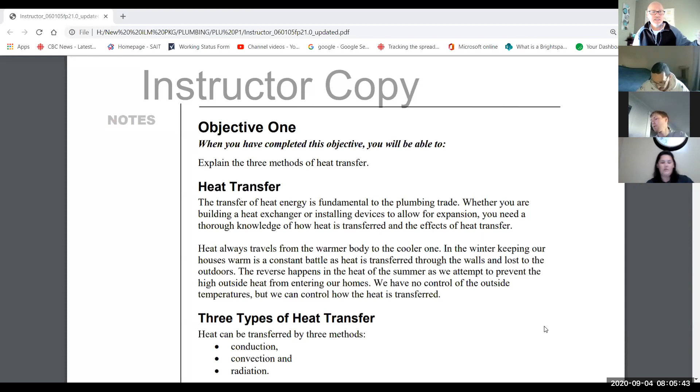Does anybody know? We live in the north, in the Arctic, don't we? Without heat, and we all know winter is coming, so to speak.

Yeah, we all die. So we live in a cold climate for 6 months of the year, colder, and we need the heat. So this is really important to us.

So if you are a highlighter type person, heat always travels from the warmer body to the cool one. Okay, it really does.

When I go to bed, the wife sucks all the heat out of me. It's really crazy. She's got cold feet, and they're like ice cubes when they come in contact. Anyways, heat travels from the warmer body to the cooler body, and that's how we do it.

We have no control of the outside temperatures, but we do control how heat is transferred. We have 3 methods. Here's the 3 methods we're going to talk about today: conduction, convection, and radiation. And of course, you probably already know some of this stuff.

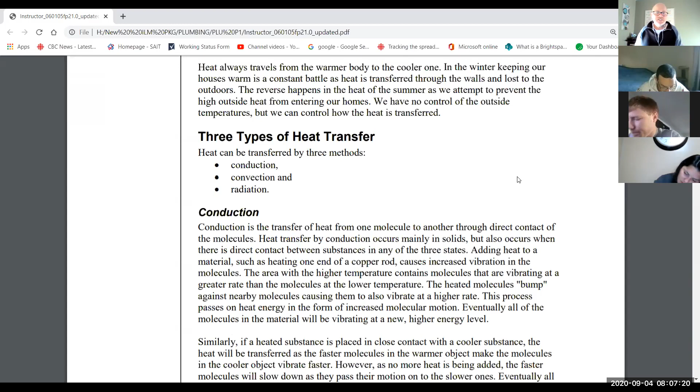So conduction basically means touching. When the molecules are together and they're touching, the heat is transferred from one molecule through direct contact to the other molecules. And they get excited, right? When they get heated up, they start to move faster, and they get excited, and good conductors for conduction, it transfers through that body really quickly and really easy.

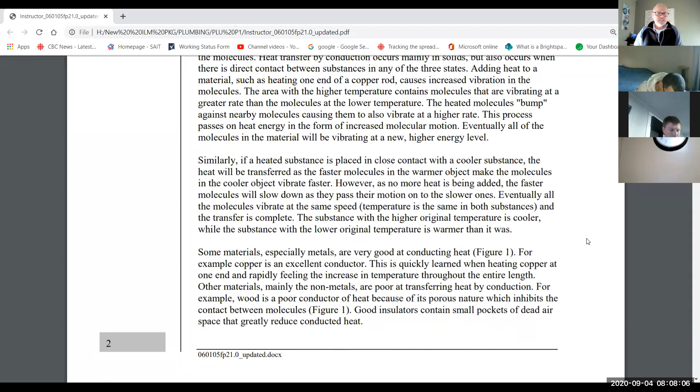So this couple of paragraphs, I'm not going to read this to you because I don't want to. But it really is about the transfer of heat through conduction is about touching. It's when something is touching something and it transfers that heat.

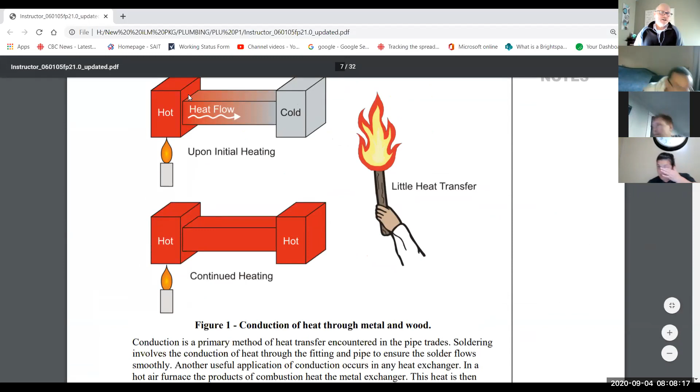Now let's have a look at this picture. As you can see, if this block here, if it was copper, and if I heated one end, the molecules will continue to heat up or move, if you will. As they move, they will transfer all of that heat throughout the entire body. And that is really what conduction is all about.

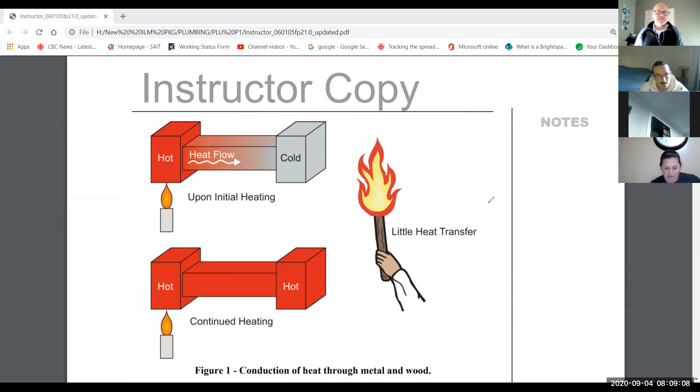Now look at wood here. You could have a wooden match lit like this, and really there's no real heat transfer in the wood. Is wood a good conductor then? No, wood is not a good conductor. It is truly not.

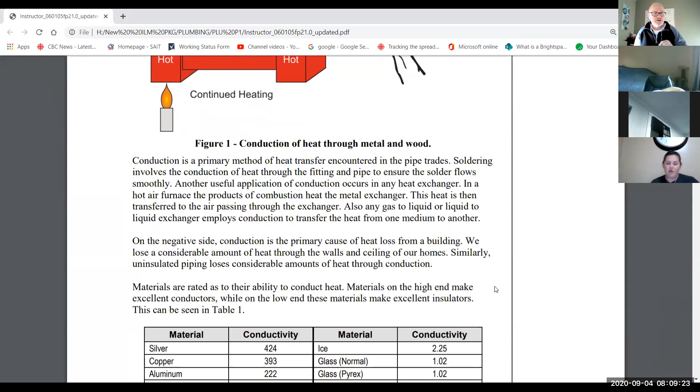So conduction is one of the primary methods. Remember we said 3 methods of heat transfer. It is one of the primary methods. They talk about useful application of conduction in a heat exchanger.

A heat exchanger is where you take cooler water, running through a coil, coming in and going out. And then you have warmer water coming in and going through a coil. And as a heat exchanger does this, you tend to start to heat up.

You tend to start to heat up this blue colder water as it goes through the heat exchanger, and you get warmer water coming out. So it is the transfer of heat from the warmer body to the cooler body, basically just like that. So this comes from a boiler, from a heating system, and through a heat exchanger, you transfer heat. That's what they're talking about there.

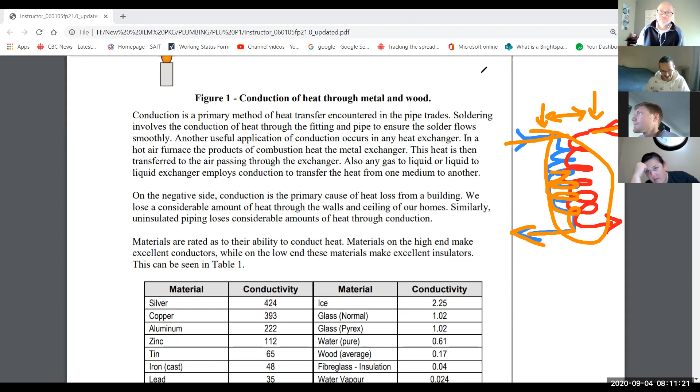What are you doing? Say again? No, I was talking to my cat, sorry. Oh, good morning, cat. Didn't strike me as a cat person, but that's okay. I have a cat. Really, cats are the laziest animals I think I've ever seen in my entire life. Absolutely, just lazy. They don't have to hunt, gather, nothing. The darn thing just poops in a box in my hallway. I don't even know. That's it. He just sleeps around the house and sleeps everywhere. Scratches me when he can't eat or needs to eat. I don't even know. Yeah, same as mine. Yeah, same thing. Okay, so we're on that. I should get a dog. Or a mouse or something.

Okay, look, on the negative side, there's a negative side to conduction. There's a negative side to every form of heat transfer. The negative side is that this is the primary cause of heat loss in a building. So when we're building buildings these days, the idea is to try to get a very, very tight envelope, right? That's the building shell, so to speak. We want our building envelope as tight and as insulated as possible so we don't lose our heat.

But the Alberta Building Code states that we also have to exchange the air within our buildings completely. A half air exchange per hour, I think, is the latest ABC building code. Now, let's see if I can annotate this.

ABC is the Alberta Building Code, right? And they require a half air exchange every hour. What does that mean? It means that the air inside our houses and buildings needs to be moving, and we need to take that air out and bring new air in.

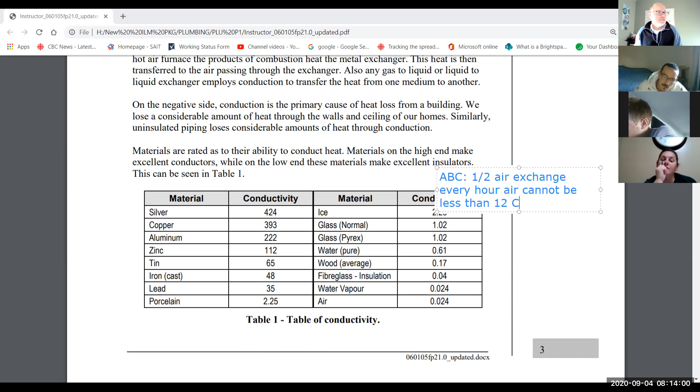Now there's an issue with some of this air coming into our houses and buildings, it gets cold outside, yes? And so the Alberta Building Code also says that air cannot be less than 12 degrees Celsius coming in. Which means for bigger buildings, apartment buildings, etc., we need makeup air units that heat up the air before it comes into the building. The air we're pumping into our building has to be above 12 degrees Celsius.

Now, have you ever opened a building door on a tall building and the air is pushing outwards? There's positive air pressure in those buildings, okay? So every time you open the door, you can feel the rush of air hitting you. It means there's positive air pressure within that building, and they keep it like that so they can keep the heat in, believe it or not. Okay, so that's how that kind of works.

Okay, let's see if I can scroll down here. Oh, that thing just stays with me wherever I go. Nice, I don't want it to.

There we go. Now look at this table, this lovely table right here. It says this material is rated according to conduction. It's a conduction table, a table of conductivity. So silver and copper are good conductors.

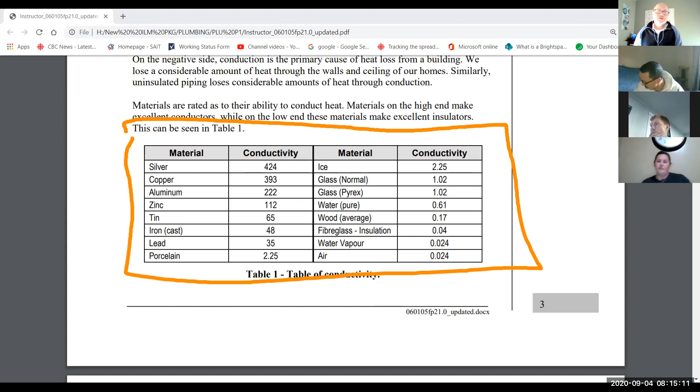Does anybody know why? There's a reason, does anybody know why? Purity? What's that, their purity? Nope, no. I'm going to tell you it's because of their makeup. It's because they have these extra electrons hanging around them, and these free electrons, so to speak, tend to move freely through the material.

So we use copper as a conductor for electricity, yes? We use copper as a conductor for our heated water, yes? We use it in heat exchangers. We use it a lot because it's a good conductor. So when you push, for example, electrons down a piece of copper wire, it transfers those electrons almost without any resistance, and it'll transfer all the way down to the end of wherever you have it. That's why we use it for electricity. It's a great conductor, it has that free electron that allows the transfer of electrons throughout that whole piece.

Now look at air. Is air a conductor? No. Well, according to this table, air is a conductor. It made the list. It's a very poor conductor, though. Yes, fair enough. Okay, it's a very poor conductor, but we use it all the time, especially in our houses.

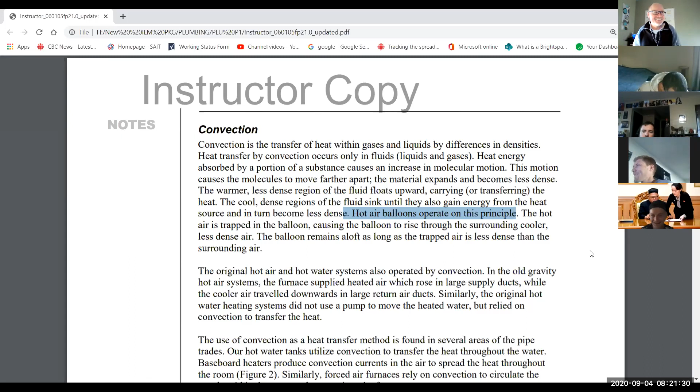Now they talk about some old gravity systems in here about how heat transfer rises. So way back, we used to heat with just a big tub of water with pipes attached to it, and we'd put a fire under it, and we'd heat our houses that way, because just through convection currents of the water, that heat would rise. So let me draw something rudimentary.

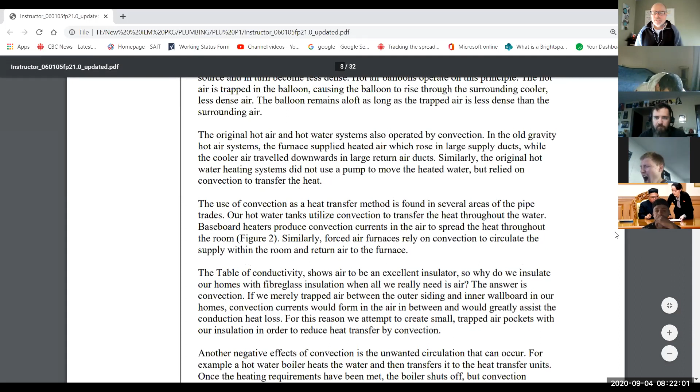So we would have a big boiler in the basement, or a big cavity full of water, and we would light a fire under it. There's my fire, so to speak. Okay, there's my fire, and they would use coal, wood, etc.

And then what they would do is they would have this water piped upstairs, and it would come back. So as this water is heated, it would go up because it's warmer, just through convection currents, and it would heat the other rooms, and through convection currents, it would come back to the boiler to be reheated. That is really the basics of a boiler. They used to do that without pumps, without circulators, just through convection currents. Now, having said that, this pipe would have to be very big, 2-inch or larger, to carry all that water, right? Because that's all you have.

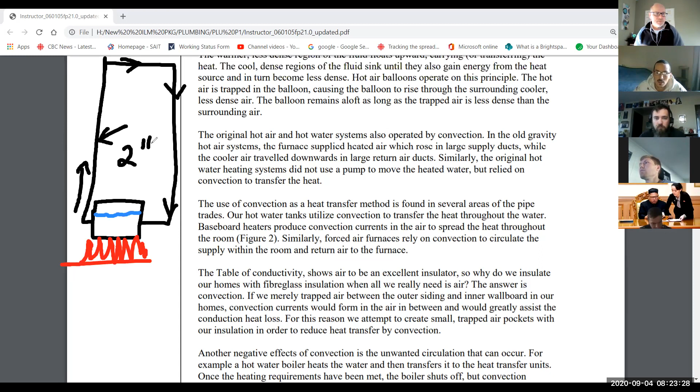That's it, but that's a very old school, if you will, type of boiler. Alright, let's clear that off. Now, baseboard heaters produce convection currents of the air to spread throughout the room. And then again, forced air furnaces rely on convection to circulate the supply around the house.

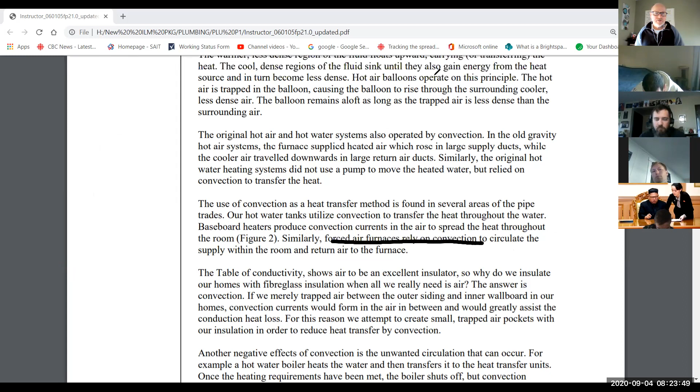Okay, now let's clear all of that. So there's negative effects too, positive and negative effects of convection. So we can get unwanted circulation that can occur, and they talk about a room being overheated because of convection currents. And there's different controls that we use to stop that from happening.

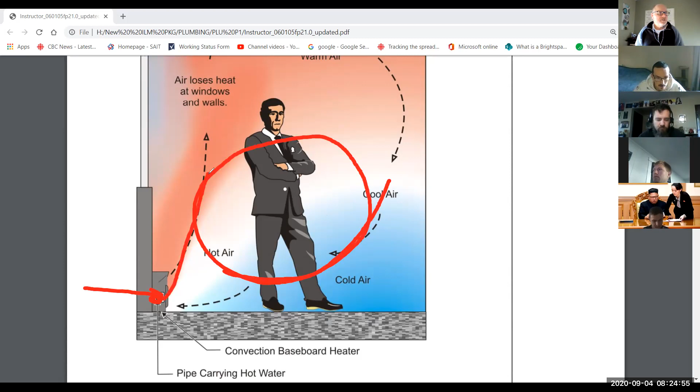Oh, there we go, convection currents of a baseboard heater. Look at this guy, he's very chilled, just sitting there. So this pipe right here is a baseboard heating pipe with the hot water running through it, and we usually have fins on that, is that correct? We have fin baseboard, so we run hot water through there, and just through convection currents we have this air circulating, the cold air dropping down, the hot air coming out. So that is just basically clear convection baseboard heating, and that's what we have there.

Beautiful, and then we get to the third one, radiation. Okay, radiation. Now they use this great term, electromagnetic infrared rays. That's fine, but heat will transfer on a radiant issue without heating the air in between it. It heats the objects, it's the sun in the sky, that's radiant heat. It does not heat the air, it heats the objects, which then heats up the air. Really, that's what it is.

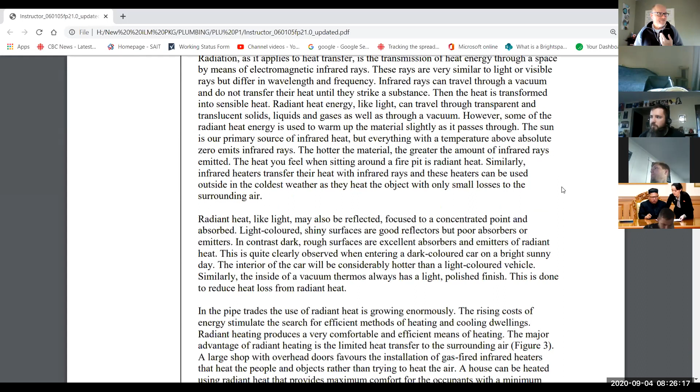So it says that this can travel through a vacuum, and that's the sun, really. A fire pit is radiant heat. We have radiant heat from a fire because we feel that heat from the flames. It's not heating the intervening airspace because it could be cold outside. We could have a fire and feel the heat from it, but it's not heating the air.

Radiant heat: light colored shiny surfaces like my head are poor absorbers or emitters, right? In contrast, dark rough surfaces absorb that radiant heat quite easily. So in your car, you ever get in and burn yourself sitting on your seat? I have, right? Kind of like that.

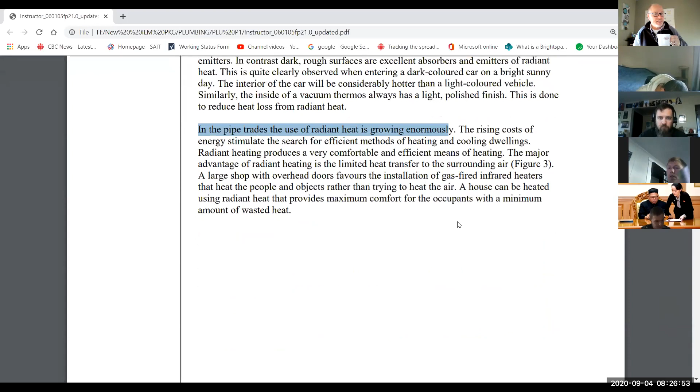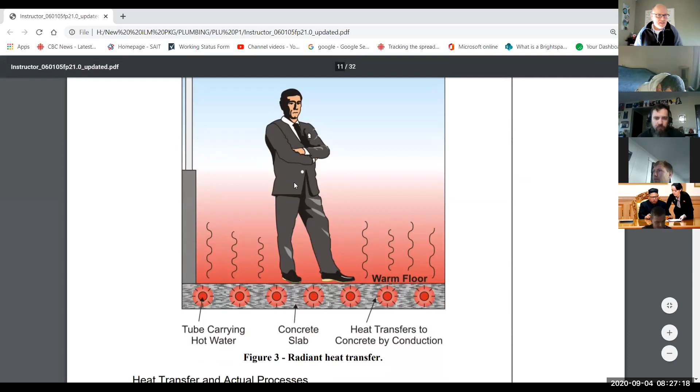Now in the pipe trades, we use radiant heat a lot, yes? The major advantage of radiant heat is limiting the heat transfer to the air. It's heating the objects, and that's why we love this. We love radiant floor heating. Look at this guy again, right? Great picture. Radiant floor heating, it's not heating the air, it's heating the objects that it comes in contact with.

Now this is very important right here: three methods of transferring heat. There's always the three methods happening all of the time. We can't escape that, but just one is more prevalent than the others. So it all happens at the same time, but one is more prevalent than the other. So when you get a question asking is this conduction, is this convection, is this radiation, you have to figure out which one is more prevalent. That's all, okay?

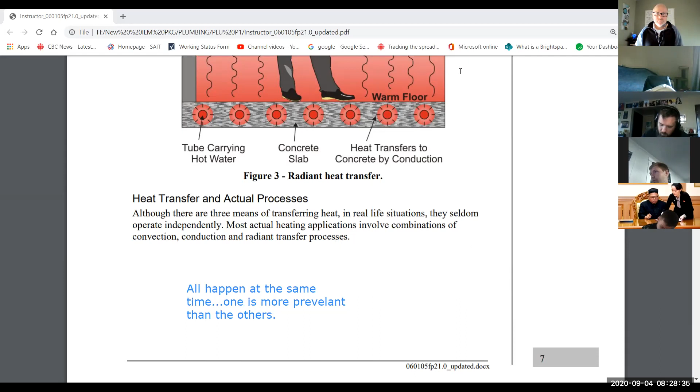Okay, we're moving on. Now they went to an exercise, and I think I have some of these questions in your exercise that's coming up, so I'm going to skip that. And we get into expansion and contraction.

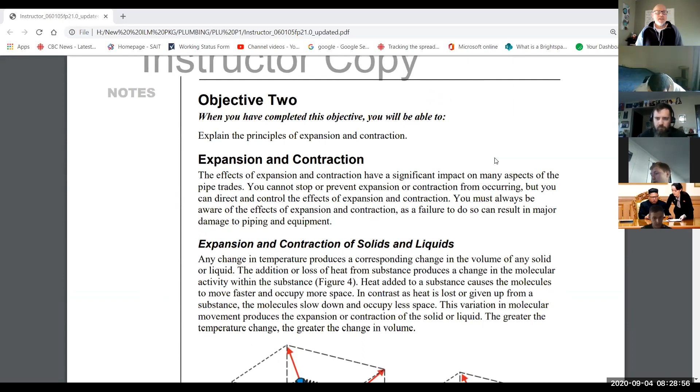Does anybody have any questions so far on the three types of heat transfer? Okay, awesome, thank you.

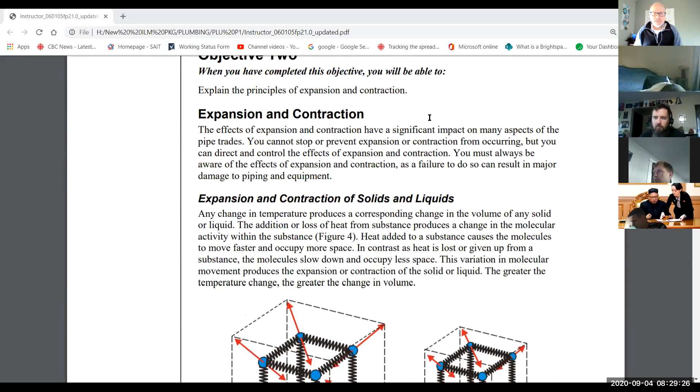All right, expansion and contraction. Listen, everything expands, everything contracts. Even you, right? Even you expand and contract, depending on how you're feeling sometimes. That's just a joke. But listen, all of our materials that we use in construction expand and contract. You must always be aware of the effects of expansion and contraction because we can do damage if we don't control it. Now my house is a little older, and when I'm in my bathroom and I run the hot water in the sink, I get this little tap going on.

Can everybody hear that tap? That happens inside the wall, that tap. And what that tap is all about is that's my ABS pipe expanding inside my wall when I'm running that hot water through it. It slows down after things settle. So if you haven't heard that before in a quiet space, you can sometimes hear it in some older houses. And that's the pipe actually expanding, and it's rubbing against the wood.

And I would really, you know, when you guys are drilling your holes in wood, so here, if this is wood and you have to drill a hole to put a pipe through, I'm going to really emphasize that you make sure that hole for that pipe is big enough. If you get it in there super tight and just barely moving, it's going to make noise in that piping system, whatever it is. If it's the hot water line, if it's the drain line, if it's the heating line especially, make sure there's room for that pipe to move within there.

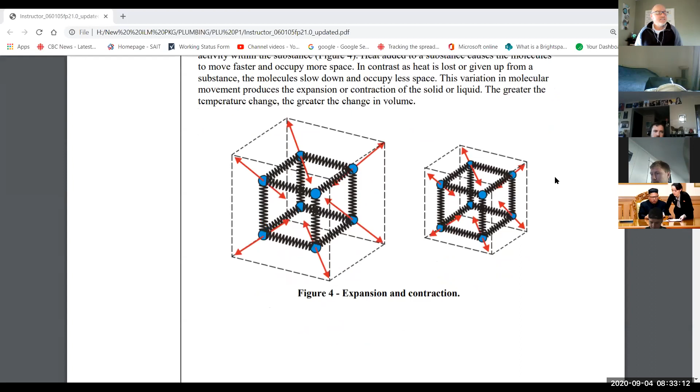So look at this picture right here. This shows expansion and contraction of molecules. As they expand, they get bigger. As they're heated, the molecules get faster and bigger on a molecular scale. The greater the temperature change, the greater the change in volume, because things get bigger and smaller, really, is what happens.

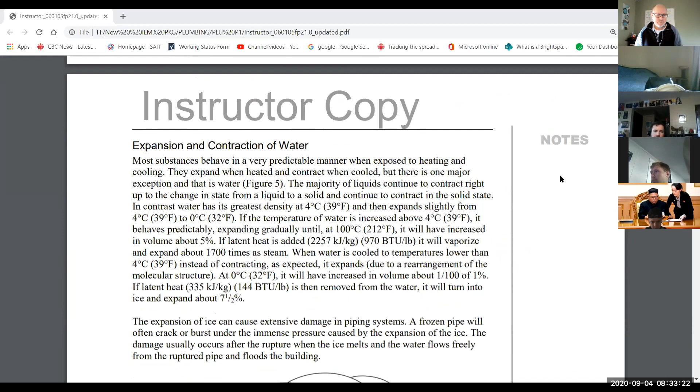Okay, so this is super important right here. This next part is expansion and contraction of water. So I'm going to go down to this picture right here, and we're going to talk about this for a second.

Water does some weird stuff. Water is most dense, at its maximum density, at about 4 degrees Celsius, or 39 degrees Fahrenheit. Those are two important numbers. Please make note of those. Water is most dense at 4 degrees C.

That's when water is settled down at the bottom of a lake. That's where it sits, that heavy, dense water. It's heavy, and warmer water goes to the top. So if you ever dive in a lake, it gets colder as you go deeper, and this is exactly why.

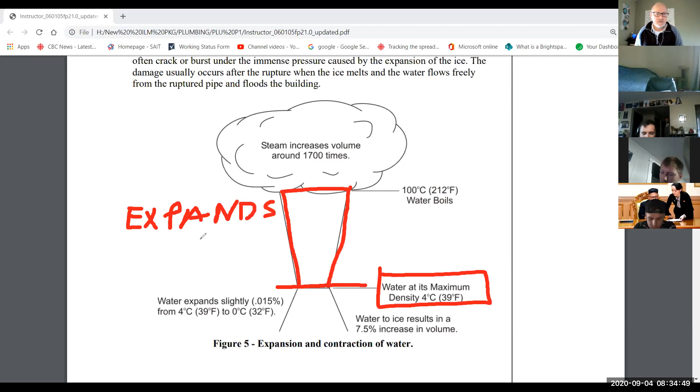So when water is heated, as it comes up like this, as water is being heated, it expands about 5% its volume as it's heated up to the boiling point. So from here, when it gets up to there, it'll expand about 5%.

Now this is the reason why in heating systems we need expansion tanks. We do not want the expansion of this water to take place in the heating system. We want it to take place in an expansion tank. Rob should explain a little bit more about that later to you. So that's why we need to have an expansion tank.

Is water expands as it's heated, yes? And then when water boils, look at that, water expands again. It expands 1,700 times its volume when it boils. Crazy. So as we heat water, it expands, and when we get it past the boiling point, look at those temperatures right here, it expands 1,700 times its volume when it goes to steam.

Similarly, when we have water down here at its most dense, when it gets colder, look at this, it expands again. Water expands when it gets colder than 4 degrees C or 39 degrees Fahrenheit. It expands more. Water expands slightly when it gets to 0, and then when it freezes, it expands again. So water expands when it freezes. Water expands when it boils.

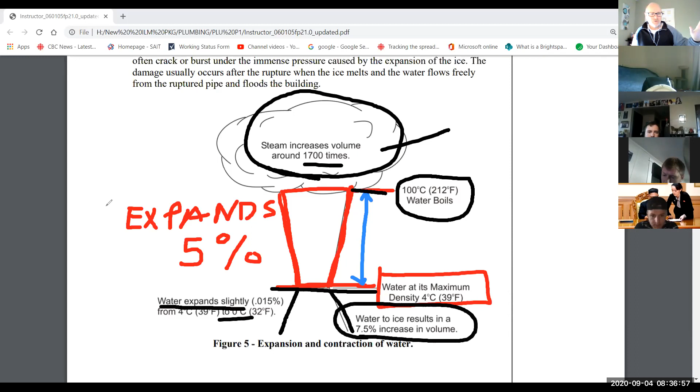It's craziness, okay? So those numbers, you need to know those numbers, 7, 5, you need to know, you need to know. Okay, water does some crazy thing.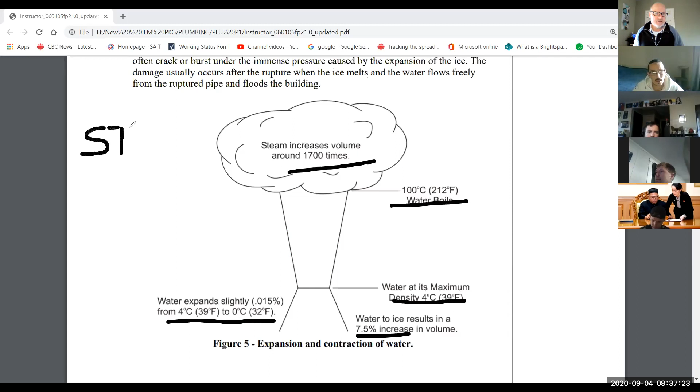And now I have to make a little caveat on this, is that all of these numbers will be at STP. Anybody know what STP means? Standard temperature and pressure. That is correct.

Okay, let's just see what we can do here. I'm going to make a couple of notes about that because I think this is an important part. We need to make sure we know this, and we know it from first year, but we do need to go. I know this is a little lagging, but it's okay.

Standard temperature and pressure. Did everybody see that screen? Am I sharing that correctly? Nobody can see anything yet. Hang on a second, I got to share a screen here. Here we go, can you see that? I don't even know what I'm looking at. Can everybody see my screen? It says standard temperature and pressure. Yes? Okay, good. Just, yeah, head shake is great. Somebody wants to unmute their mics and answer at any time, please do so.

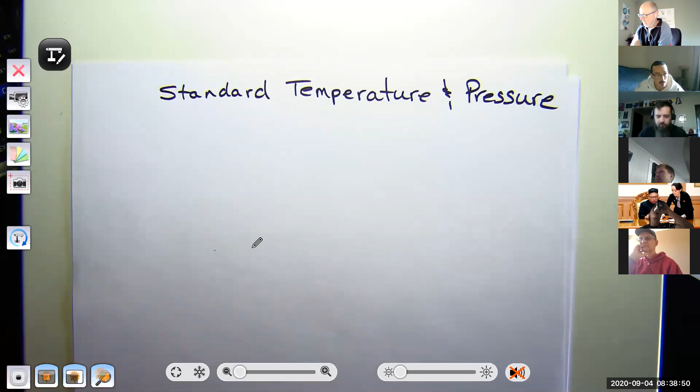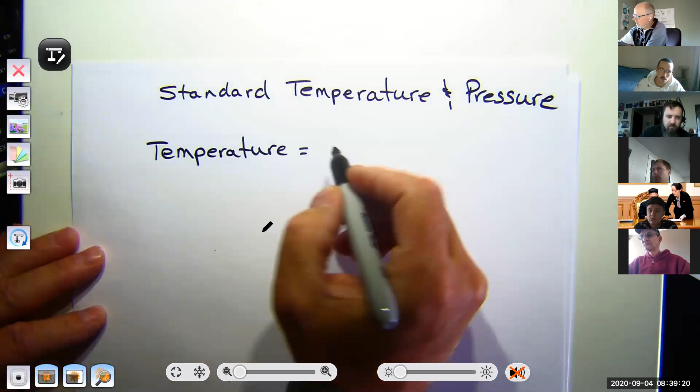So standard temperature and pressure, we're going to go standard temperature first. Does anybody know what standard temperature is? 20 degrees? How much? 20 degrees, that's pretty warm. 15 degrees C, there we go. It's actually more closely to 15.5 degrees Celsius.

Now, next time you are pumping gas for your vehicle, right on the gas pump, right where the numbers come for your payment, it will say just below that, volume corrected to 15 degrees C.

Because they want to sell you that fluid, that petrol, at a standard temperature. What happens to the volume of fluid as it's heated? It gets bigger, and as it's colder, it gets smaller. So they want to sell you that fluid at a standard temperature, so that volume is at a certain temperature. This is why in Canada, our gas containers for gas pumps are buried underground, so they maintain a standard temperature. In some southern states, you can have the gas containers above ground in tanks around the petrol station. There is an equivalent: 60 degrees Fahrenheit is also standard temperature. So all of our calculations have to be at standard temperature. We're not adding temperature to them yet, but all the liquids and gases we deal with, we assume are at standard temperature, unless we heat them.

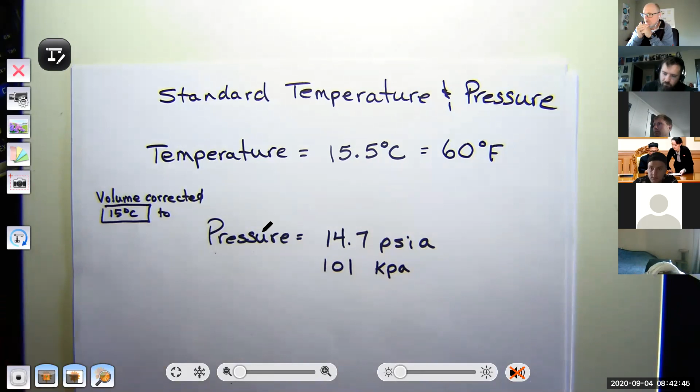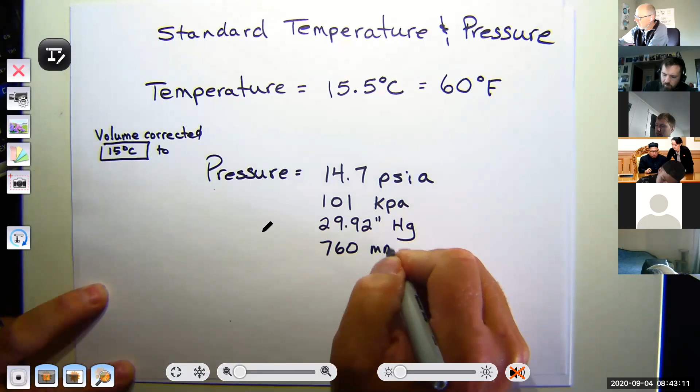Now we need all the equivalents of that. Does anybody know what the metric equivalent of 14.7 psi is? 101 kPa. Now we also use, unfortunately, mercury as a pressure rating. Mercury at sea level is 29.92 inches of mercury. And there is a metric equivalent to that as well: 760 millimeters of mercury is also standard pressure.

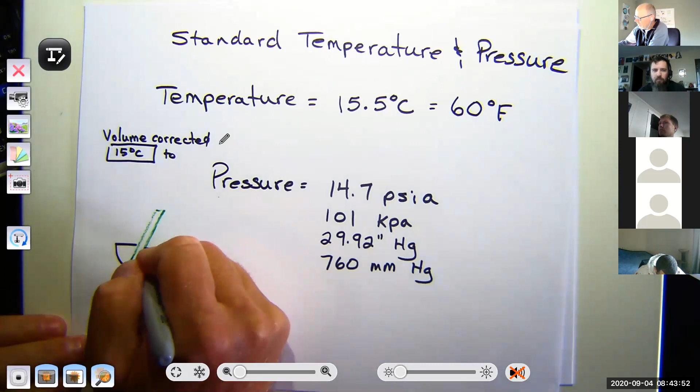Does anybody know how this 29.92 inches of mercury came about, and how they figured that out? He walked around with a tube of mercury. That's right - the guy walked around with a bowl filled with mercury, and I'm going to color my mercury green. He had a tube in that bowl, closed at one end but open at the other. He filled the bowl full of mercury, and at sea level, the pressure exerted downward in that bowl kept the mercury up the tube to 29.92 inches.

Then when he went up and down the mountains with his little tube, he noticed the mercury level started to drop as he went up a mountain. So there's less air pressure at higher elevation.

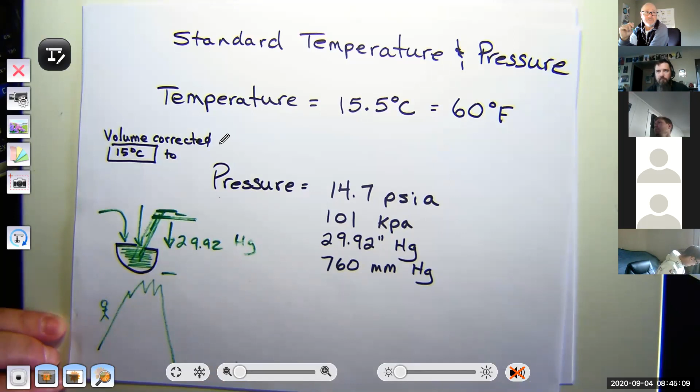And this is why my golf ball flies farther here in Calgary than it does in Vancouver. In Vancouver I don't feel the same - I can't hit my ball nearly as far because of the air pressure differences, because we're at a higher altitude. Does anybody know what our altitude here in Alberta is? 3,400 feet above sea level for Calgary.

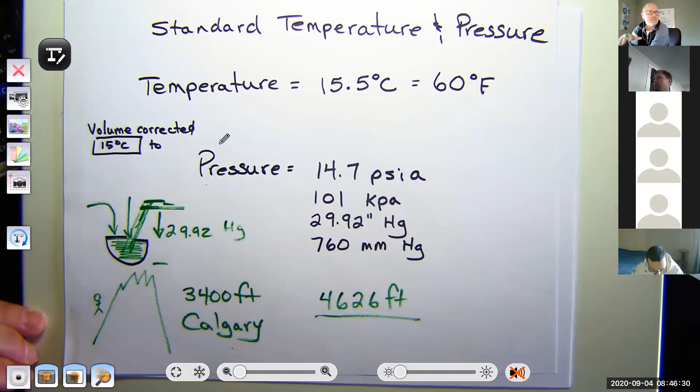If you drive straight west on number 1 highway, you come to a place called Scott Lake Hill on your way to Canmore - that used to be, a long time ago, one of the highest highways on the Trans-Canada. Scott Lake Hill on the way to Canmore is about 4,626 feet above sea level. That's why our Rocky Mountains don't look as high as mountains in Europe or other ranges - we're already on a very high plateau. So our 10,000 foot mountains only seem about 6,000 feet high, because our valley floor is higher than most. That's a little geography and traveling information for you.

Cool, huh? So this guy that did this particular walking around... I have a chat issue here. I don't know, interesting - yeah, it is interesting.

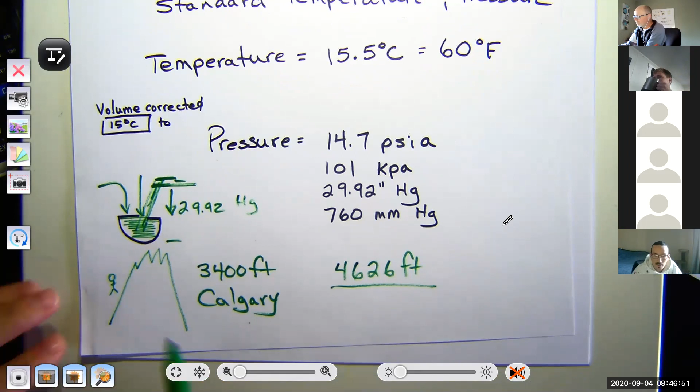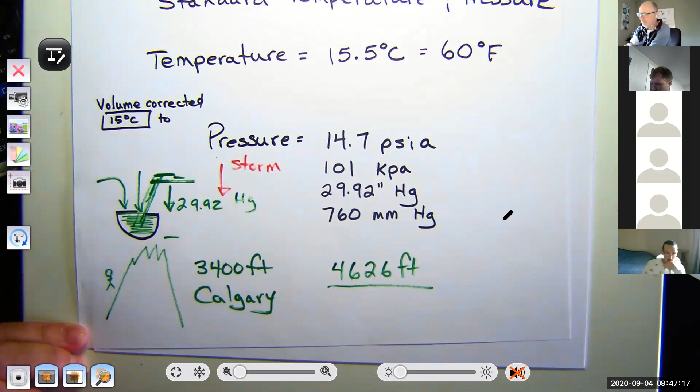This guy that walked around and did this also noticed that when a big thunderstorm came over the horizon, his pressure dropped as well for a storm - the pressure went down. And when the sun came out, that pressure went back up. So he created a barometer and started predicting weather according to it. This guy's name was Torricelli - I don't know why all those Italians got really smart, but there it is. So this is the guy that created the barometer, and he also figured out pressures and what standard pressure is at sea level.

All right, well that was fun. All those cool looking notes. How's everybody doing?

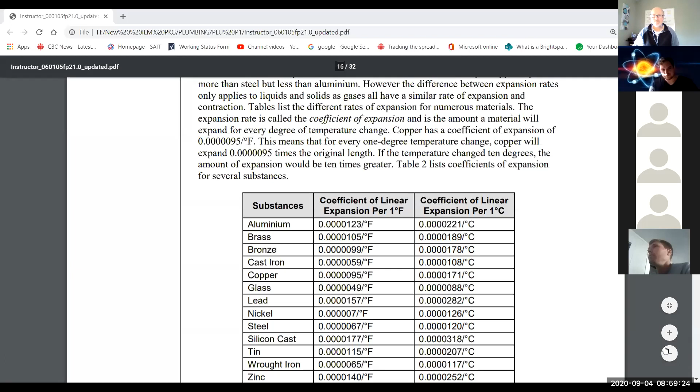Okay, is everybody back? I hope so. Is everybody back? Okay, I'm going to start up again. So here we go, I'm going to share a screen. What screen am I going to share? I'm going to share this one. Everybody see my screen about coefficients of linear expansion? Just give me a head shake, does everybody see that screen? Yep. Okay, awesome, yeah.

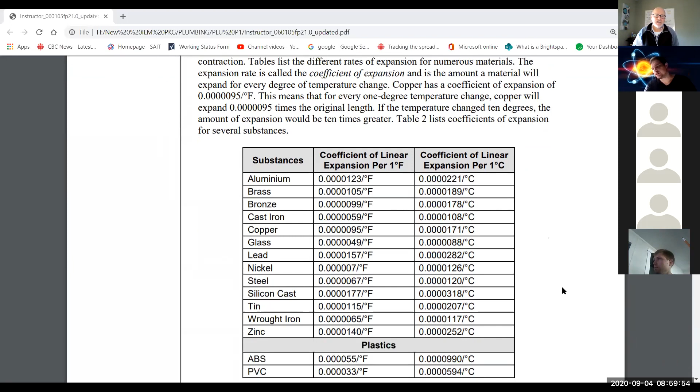So what this is saying is that different substances expand and contract at different rates. They give a list of those substances and a rate, which is the coefficient of linear expansion per degree, either Fahrenheit or Celsius. So one is metric, one is imperial.

This is the reason why we need expansion and contraction devices in our piping systems, because this stuff contracts. We need to calculate how much things expand and contract. So I'm going to do an example of that with you.

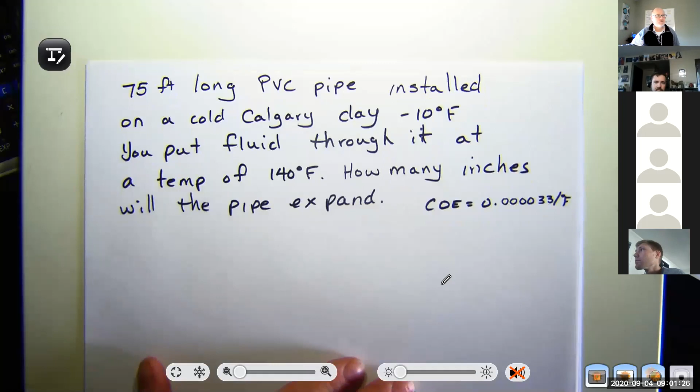So I have a 75-foot long PVC plastic pipe installed on a cold Calgary day, minus 10 degrees Fahrenheit. I really want to make the note, if you're working imperial measurement, everything has to be in imperial measurement. Your coefficient of linear expansion has to match. If it's Celsius, use the Celsius one. So we have the 75-foot long PVC pipe installed on a cold day, minus 10 degrees Fahrenheit. You put fluid through it at a temperature of 140 degrees Fahrenheit. How many inches will this pipe expand?

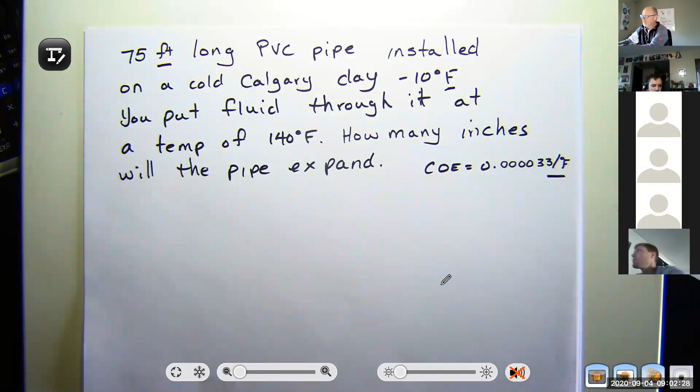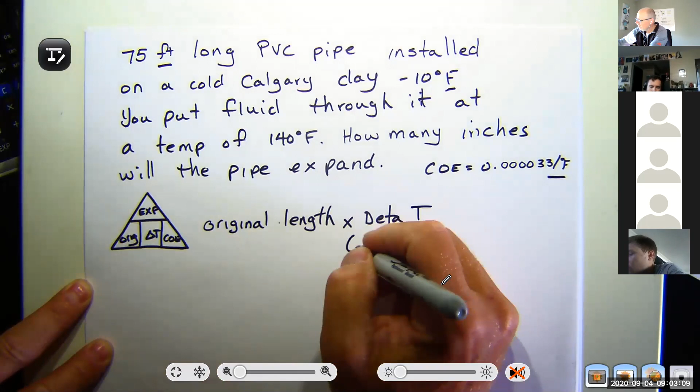So the formula we're going to use is right here, and this is the expanded amount. What we do is take the original length, multiply it by the delta T, or temperature change, and multiply it by the coefficient of linear expansion. So: original length multiplied by delta T, which is the temperature change only, multiplied by the coefficient of linear expansion, equals the expanded amount. There's the formula for calculating linear expansion of a pipe or product.

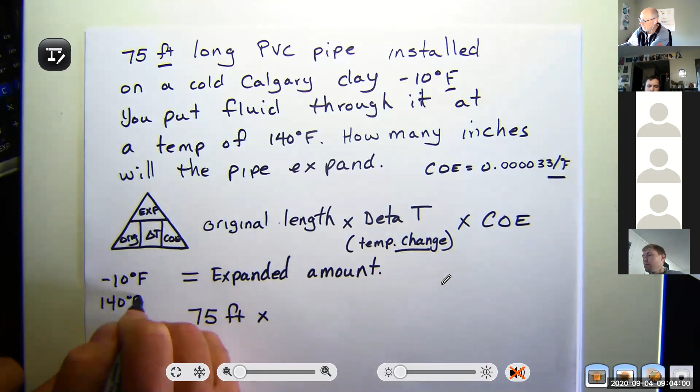So let's do this question. My original length is 75 feet. My temperature difference, going from minus 10 degrees Fahrenheit to 140 degrees Fahrenheit, is a change of 150 degrees. Everybody see how I came to that number? It's how much that temperature has changed within that piping system, so that's 150 degrees Fahrenheit.

And then I multiply that by the coefficient of expansion, which I have written down here. So I'll take out my calculator: 75 times 150 times 0.000033 equals... the answer is 0.37125 feet. It's important to realize that whatever your original length is in, your answer is going to be in the same increments of measure.

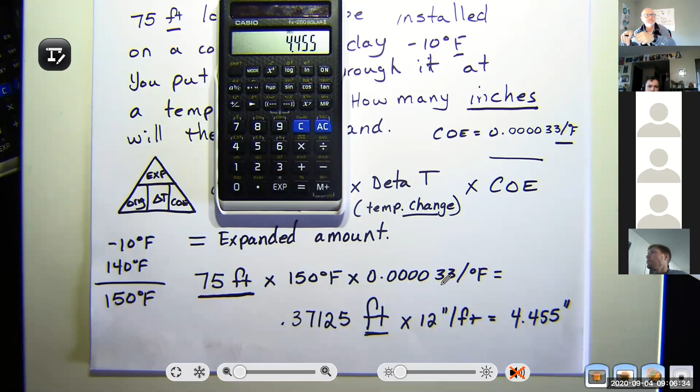That could cause all kinds of problems within that system, so we have to account for that. We have to make these expansion loops, do something to help this expansion. Any questions? I think we need to do one more example. Where's the expansion rates for the pipes at?

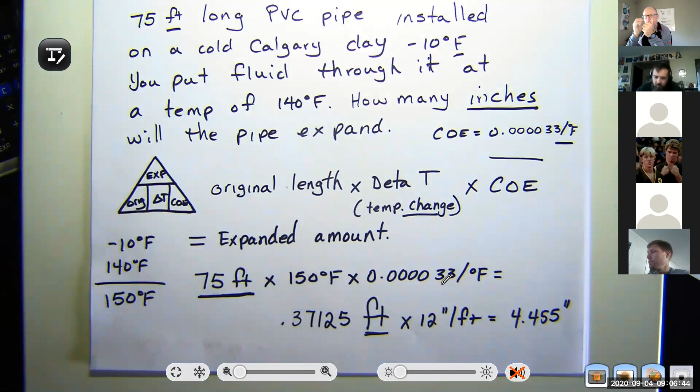Pipe size doesn't matter. Good question though. Pipe size doesn't matter. This is one time where size doesn't matter. The pipe diameter does not have an effect right now on this. We're only talking about the expansion of the outer material within that.

So if you want to turn that decimal into a fraction, you just multiply it by the denominator of whatever you wanted it to be. So if I wanted it in 16ths, I'll take the 0.455 multiplied by 16, and that would be 7. So it's 7/16, 4 and 7/16 inches.

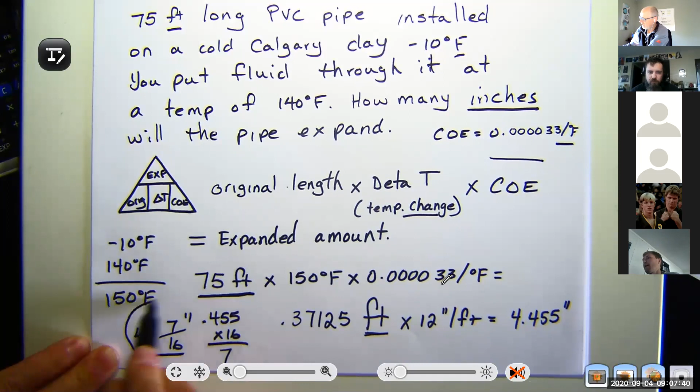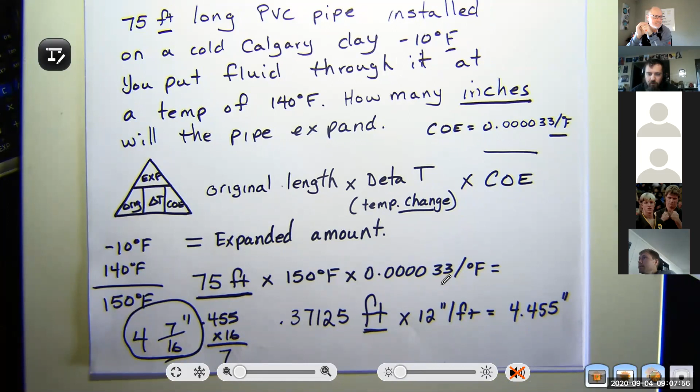Cool. Any other questions before I move on? Okay, I want to do one more example with you of linear expansion. Okay, here we go. I have a piece of pipe right here.

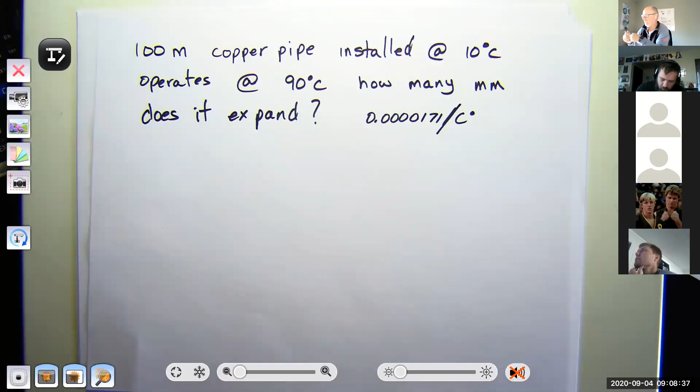The question says, I have a 100-meter long copper pipe installed at 10 degrees, operates at 90 degrees C. How many millimeters does it expand? Okay, so here's my formula: expanded amount equals original length times delta T times the coefficient.

So I'm going to take my original length, 100 meters, and multiply it by my delta T. From 10 to 90, that's an 80-degree C delta T. And I'm going to multiply it by the coefficient of linear expansion for copper pipe, which I have written down here, taken off that table we saw in the last thing in the ILM.

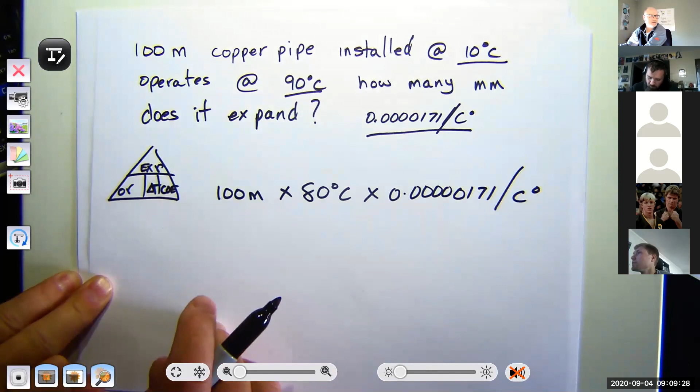And that is per degree Celsius. So if I type that out on my calculator, let's see if I can get the calculator shiny, nice and shiny up here. There we go. So 100 times 80 times 1, 2, 3, 4, 5, 171.

Ooh, I don't know what I did there, but I got a 0. Okay, let's do that again. 100 times 80 times 0.00000171. I think I'm a decimal too far. Yeah, 1, 2, 3, 4. Because this is only 4. This is only 4. I have the wrong one. Oh, that's 4. That's 4. There we go. Let me do that again.

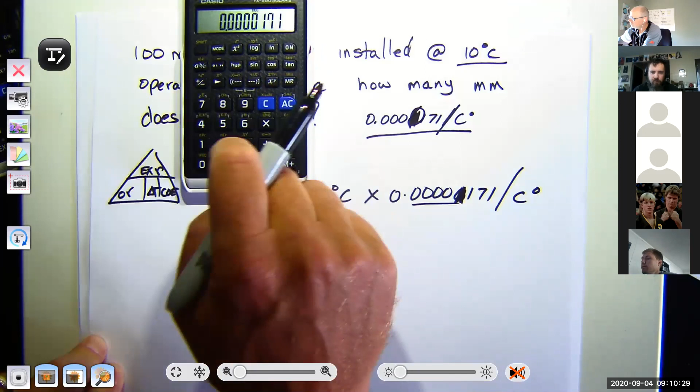There we go. Okay, there's our answer. Is that the right answer? No. No. No. No, it is not. Okay. That's right, I have to multiply it by 1,000 millimeters in a meter. Yes?

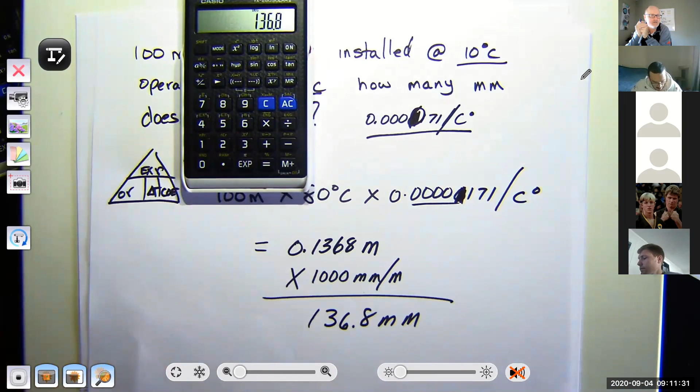So that pipe is going to expand 136.8 millimeters. Yes? There is our correct answer, with my mistakes on there. Sorry. Hopefully you can understand that. Any questions so far? No? All right.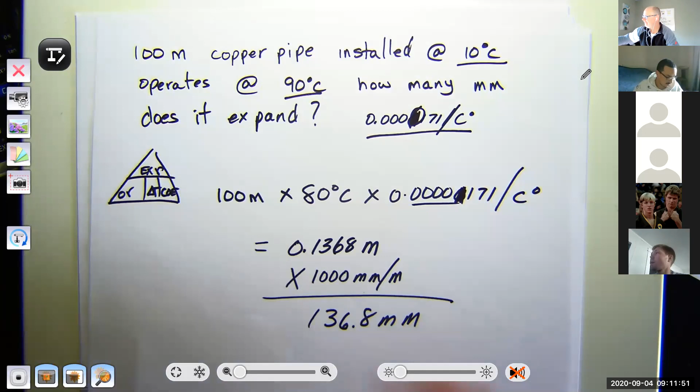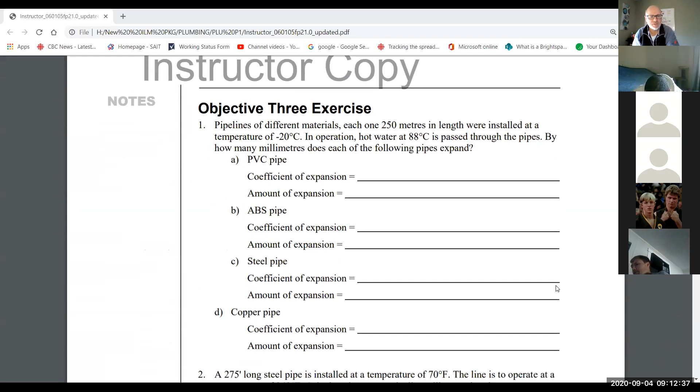Let's see. Not sure what screen you guys are seeing right now. Sometimes I'm gonna, hang on, I gotta try this again. Does everybody see my screen right here of the ILM? Yeah. Yes, okay. So again, objective 3 exercise within here is asking you to do some calculations, just practice of that. Now, let's have a look at this.

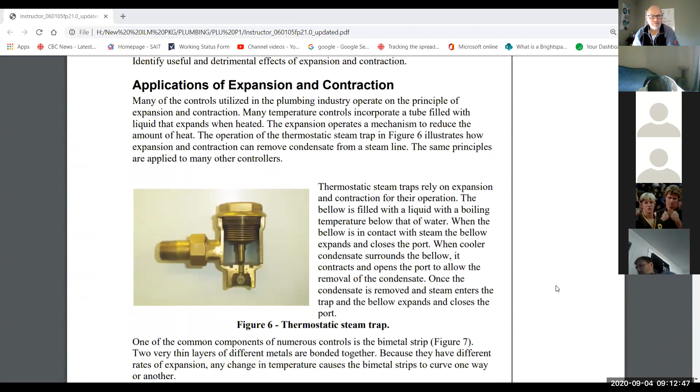Applications of expansion and contraction. Now, many of the controls in our plumbing industry operate on the principle of expansion contraction. Yes? Expansion operates a mechanism to reduce the amount of heat or not. Now, this picture right here, this picture of this thermostatic steam trap, I'm not sure if you know how that works.

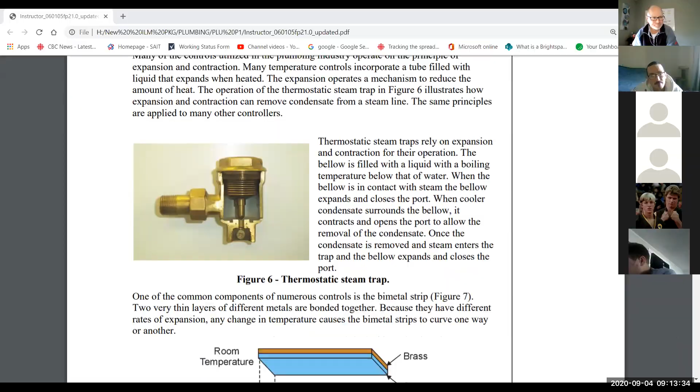So what I'm going to do is I'm going to draw a little picture, if I can, on this. Let's see if I can do this correctly. I'm going to try and share my screen again. Everybody see my little Elmo camera here? So in a steam type system, we will have a pipe coming up, carrying steam, going to, and we will have a valve here. Almost always it's a globe valve going into a steam radiator. Okay.

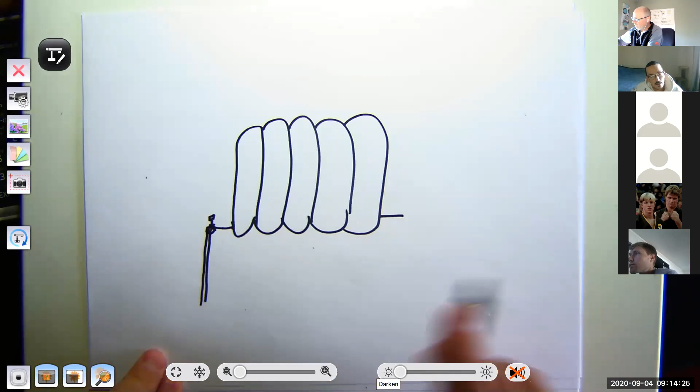So if we have steam rising up this pipe, coming into this heat exchanger, now this could be an old steam convector or radiator, sometimes they call them. It's a couple of different things. So then the steam fills up in here, right? And as the steam heats up in here, right at this location, we have that little steam trap.

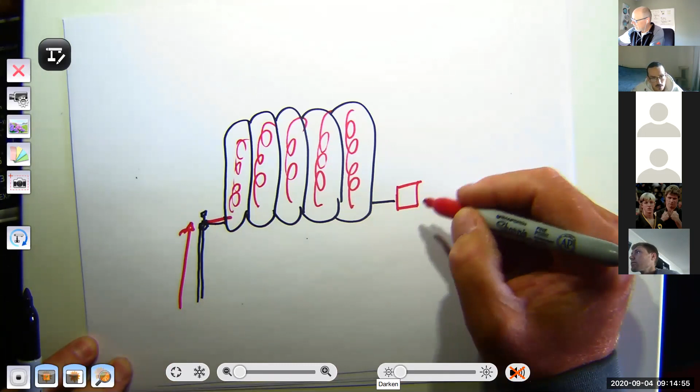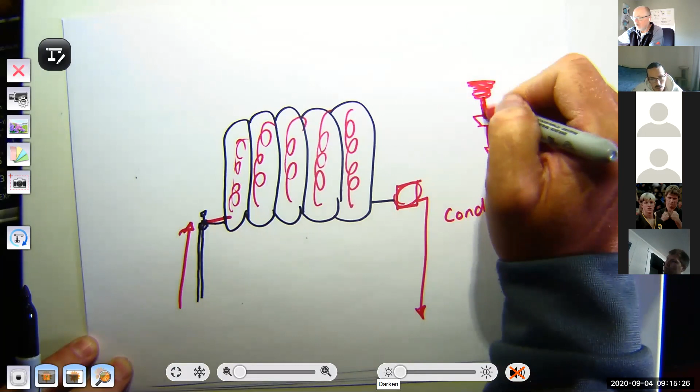And what it does is it has a bellows in it with a little plug. And so inside this, going back down, because we have to have condensate going back down to the boiler, as the steam enters here, this has a little hole in it that allows the water to flow through. So when this is heated, it plugs off the hole that allows this to go through, keeping the steam inside this heat transfer unit. Now, the heat transfer unit can be called a radiator, called a convector, can called a heat exchanger, whatever. It's a heat transfer unit, meaning it transfers its heat from one form to another.

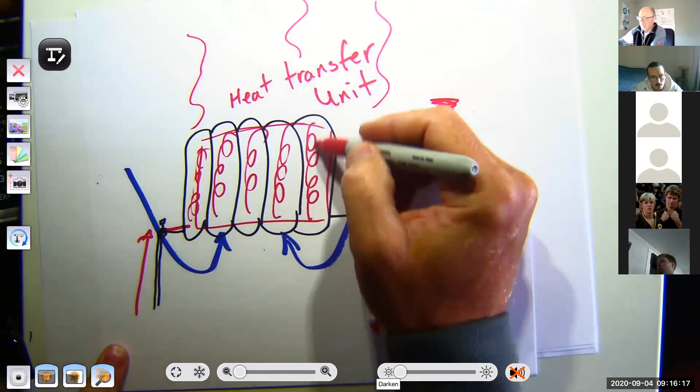Now, through convection currents, the cold air comes down and flows through, and the heated air rises off it. And as the steam is giving off its heat, it gives off heat at about 970 BTUs per pound of steam. It will give off its heat and it'll start to condense to water. And once it starts condensing to water, this steam trap that's in here will contract and open up and allow the water or condensate to go back to the boiler. So we use the heat within the system to control a device.

And that device that I'm talking about right here, that device right there is a steam trap. I'm going to stop sharing this screen. And I'm going to try and open up my other sheet here. Hang on a second.

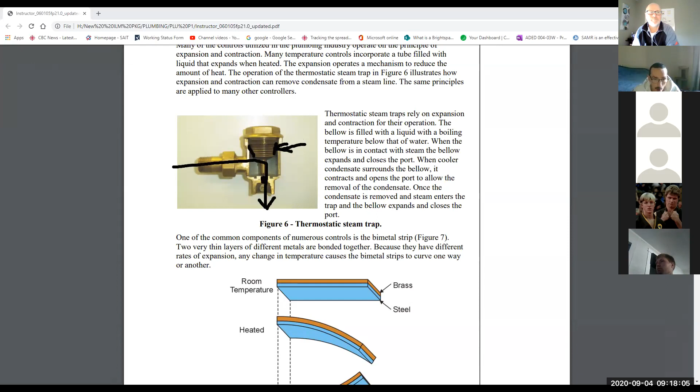So this little steam trap, we're back to this little steam trap, as you see right here. This bellows opens up on heat, closes off this little hole right here, and keeps the steam in. And when it cools down, it contracts and lets the condensate go back to the boiler. Beautiful. Works fantastic. Okay. Now, that's a thermostatic steam trap, and that's how that works.

Now, we have this next picture. Can everybody see that bimetal strip? Yeah? Ooh, okay, that bimetal strip is a principle that we use for controls as well. Because these bimetal strips have a different rate of expansion. I need to draw here. Because they have a different rate of expansion, when it's heated, it'll move one way. When it's cooled, it'll move the other way. Can anybody tell me what kind of device we use that has this principle in it? Has anybody got an idea of what we use? Thermostat? Thermostat.

I can't draw very well with my mouse, but we use thermostats for this. They're fully automatic controls that we set and leave. They will expand, shutting off our furnace, and contract, turning on our furnace. They have a little electrical pulse to them. When it contracts, it starts the furnace. When it expands as it heats up, it moves and shuts off the furnace. So it's a fully automatic control using heat in the room to control that particular heating system.

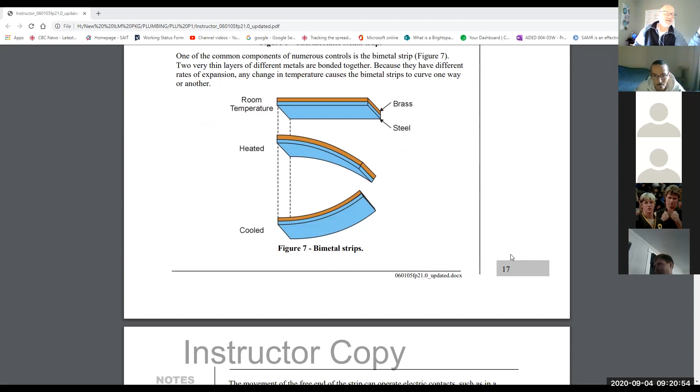In our conventional hot water tanks that we have everywhere in our houses, that you guys install probably on a regular basis, we use this rod and tube principle, expansion and contraction, to operate our hot water tank.

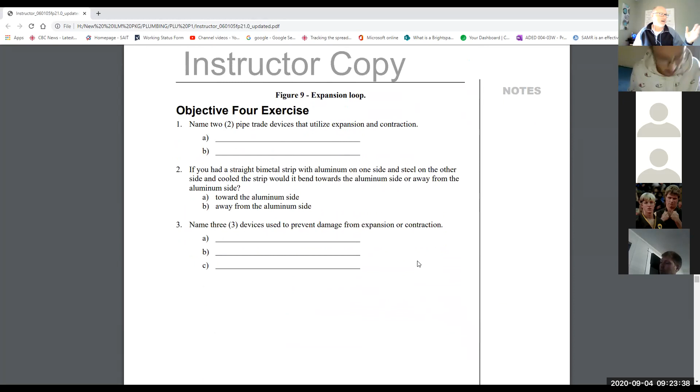And now we get to our objective 4 exercises. I'm going to move along now, and then it gets to our self-test, which means we've come to the conclusion of this ILM. Excellent, I'm going to stop sharing. Do we have any questions on some of this stuff?